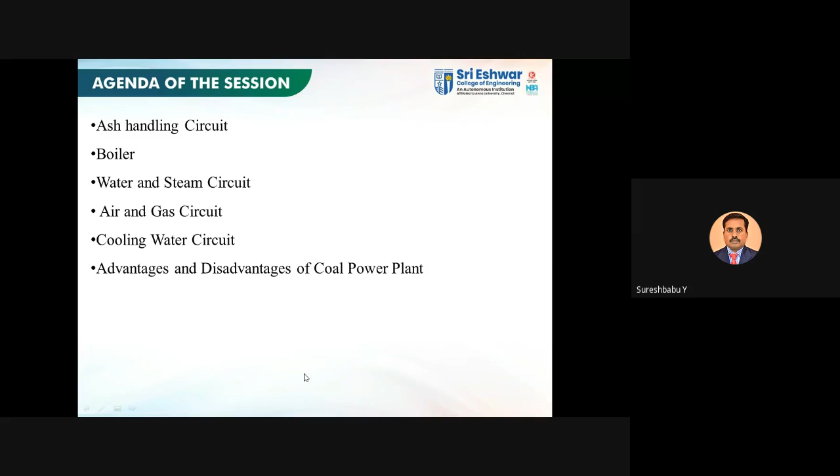Last class we discussed ash handling circuits, water steam circuit, air gas circuit, cooling water circuit, and also disadvantages of coal power plants. Today we are going to discuss the ash handling aspects and boiler. So this is our today's agenda of the session.

So why is ash handling difficult? We discussed that the reason is ash is normally at hot conditions, so you have to take care of it and it should be properly disposed from the furnace. Ash is normally of abrasive nature, and also dusty and irritative, so it should be properly handled, otherwise it will impact the person handling it. A lot of humans are involved in ash handling, so they also get affected due to the dust of ash.

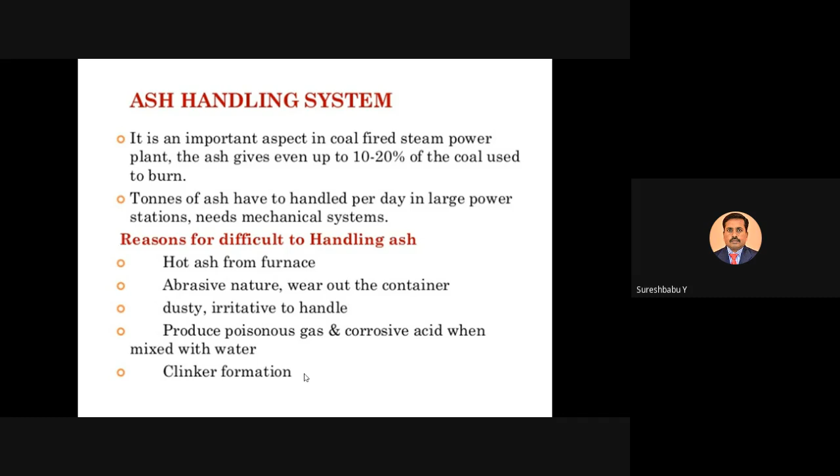So you have to use proper protective equipment, personal protective equipment, PPE kits, so that people have to use face mask, helmets, and other protective equipment, everything they have to use. So these are the reasons for the difficulty in handling ash.

So typical ash handling plant we also discussed. If our coal is a good one, then the ash produced is very less. If the coal is poor quality, then ash will become more. Every day, more than 5,000 tons of ash come out from the furnace if we produce 2000 megawatts of power from the thermal power plant, so every day you have to remove about 5,000 tons of ash from the furnace area. So it's a very big problem, ash handling is a very big problem, and you have to properly handle it.

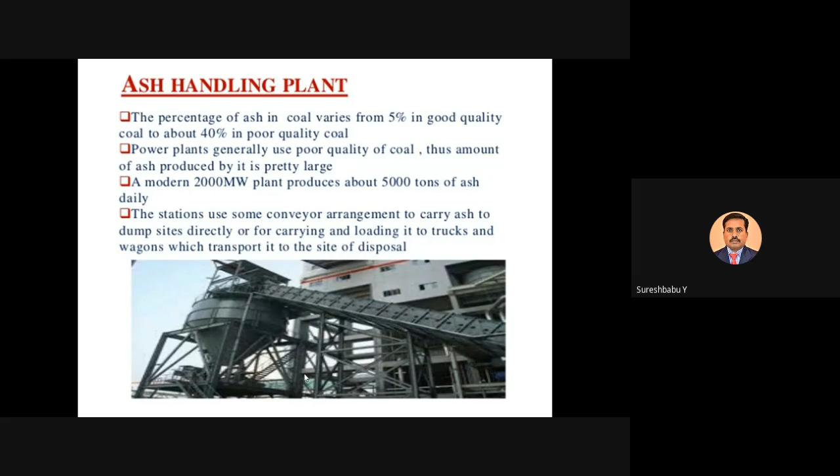That's why you need some loading devices and ash handling devices, trucks, wagons, all are required. That we discussed yesterday. And also we discussed the mechanical system, hydraulic system, pneumatic system, and steam jet system. That is also discussed yesterday. So with help of these systems only we are removing ash.

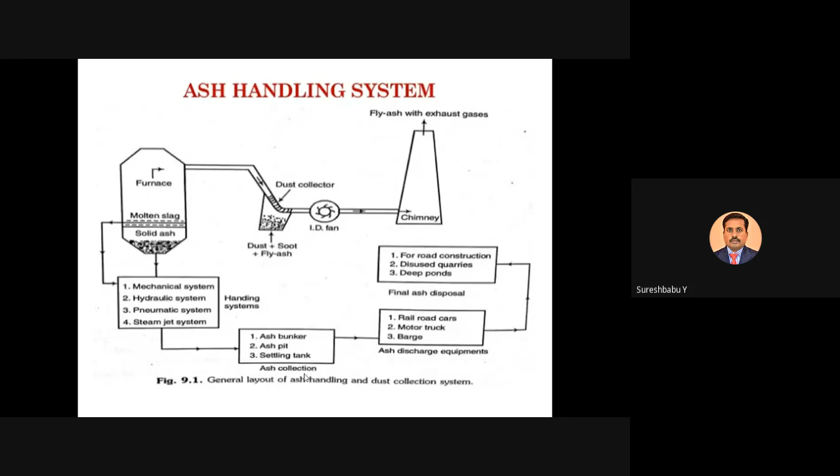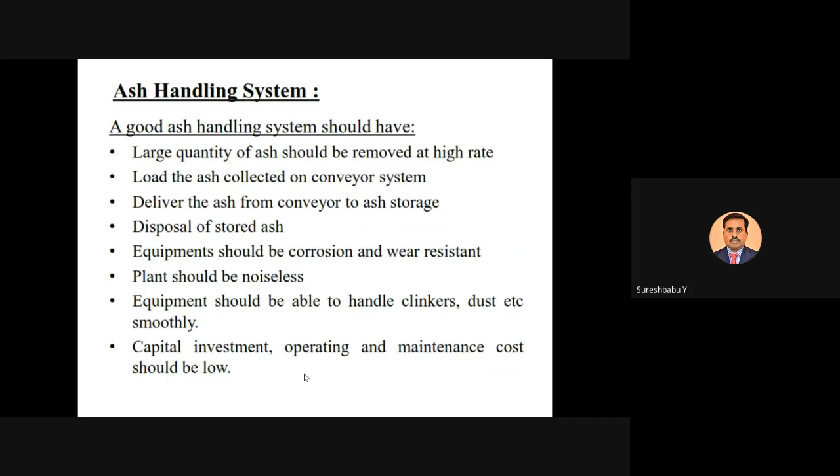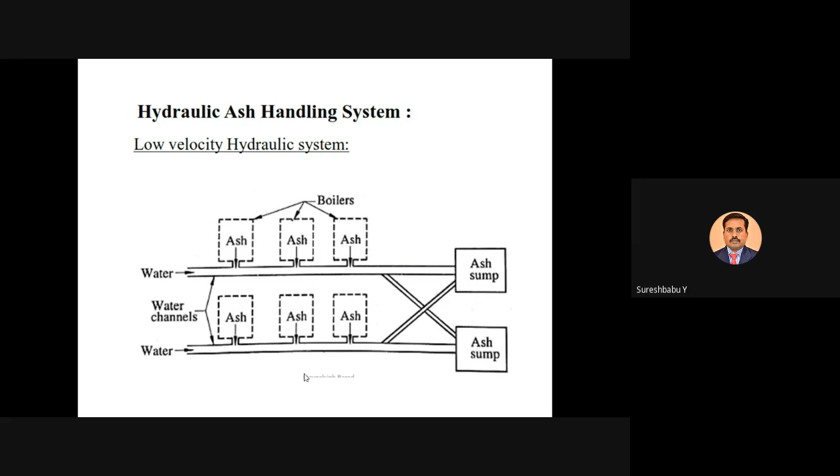The ash in the furnace area is transported from furnace to the ash storage area or ash disposal area. We discussed the mechanical belt conveyor based system, and the steam jet system along with the pneumatic system, each system's advantages and disadvantages, and what is meant by hydraulic ash handling system, how with the help of hydraulic water is used, and low velocity hydraulic system, high velocity hydraulic system, how they are used for ash handling, all those things we discussed.

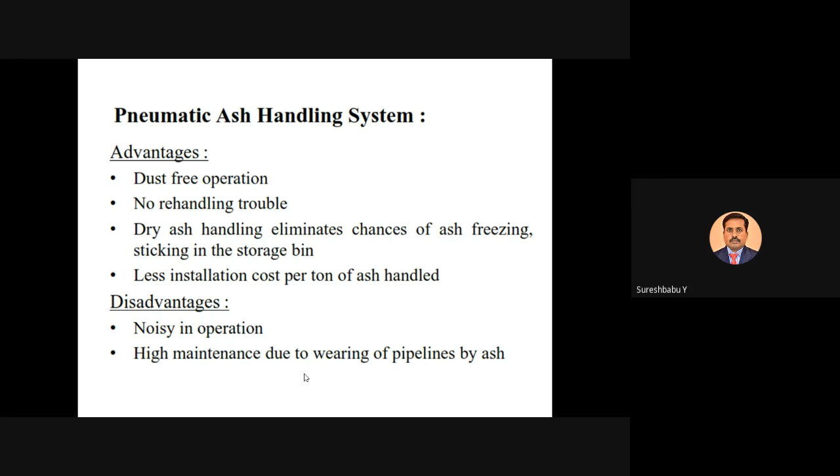And some disadvantages of pneumatic, and also some advantages of pneumatic we were discussing. Now today we come to some additional portion of ash handling system, that is dust collection and dust disposal. So this is today's agenda, after that we will move to the boiler. So this is about today's session. We will come to the point.

So dust, what is meant by dust? Dust is a very fine particle present in the ash. Normally it ranges from 0.01 micron to 1 micron, so it's very minute. Do you know what is the meaning of micron? It's a very minute particle. Micron is 1,000 parts of 1 mm.

So that kind of fine particle present in your ash is called dust. You have to properly treat this dust, otherwise it will give impact to the ash handling persons, and also impact to the environment if not properly treated. So the fly ash particle is also present in your dust.

That fly ash particle directly goes to the atmosphere, meaning the environment becomes dirtier. So it gives a lot of environmental impact to the people and the environment. We have breathing problems like cancers, asthma, shortness of breath - all these things come through this effect.

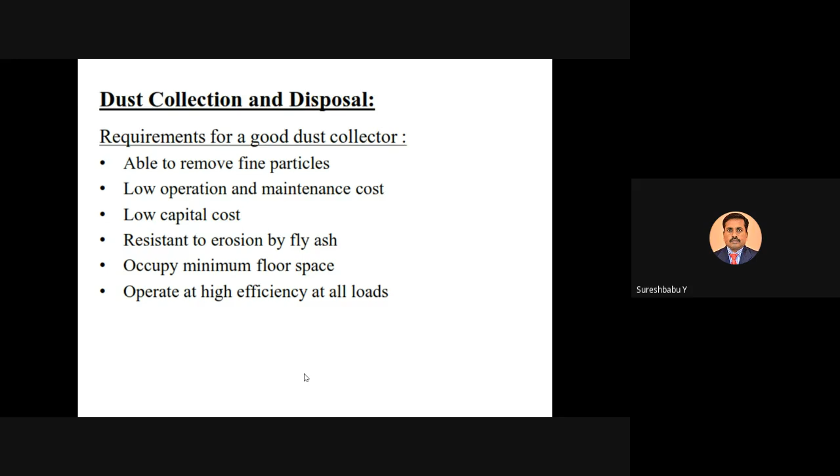If plant efficiency is high, your dust collector should also cooperate with all types of load and all types of plant operations - medium load conditions, heavy operation conditions - your dust collector should cooperate with all of these, meaning it should be flexible. That kind of system you have to develop in a thermal power plant. So the dust collector should have that requirement. These are some of the requirements of a good dust collector.

Next, dust collection and disposal. In coal-fired boilers, the flue gases have certain particles of solid matter called smoke or dust. Due to the combustion of coal, flue gases come from the furnace area, and these flue gases have certain particles of solid matter. So it has some solid particles, and that solid particle is called smoke or dust.

What is the particle size? I already told you it ranges from 1 to 100 micron. If the range of the solid matter particle size is from 1 micron to 100 micron, that is called dust. This is the actual definition for dust - please note, 1 to 100 micron. If the particle size is more than 100 micron, then that is called cinder. This is the basic difference between dust and cinder.

So what I'm trying to say is, without collecting this solid matter or smoke, that will create an impact to society, as I already told you.

For that, you have to use some dust collecting device. There are two different types of dust collectors commonly used in thermal power plants: mechanical dust collector and electrostatic dust collector. We discussed how ash is handled using mechanical, pneumatic, steam, and hydraulic handling systems, from furnace to ash disposal. In a similar manner, the dust present in the flue gas, which is 1 to 100 micron particle solid matter, should be removed before it goes to the chimney. That is the main intention of the dust collector.

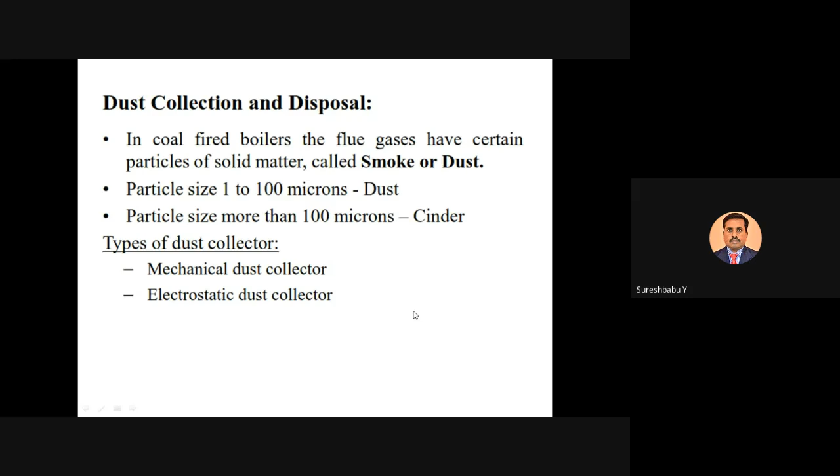Now we'll see the mechanical dust collector. The different types normally used are dry type dust collector and wet type dust collector. In the dry type dust collector, there are two types: gravitational separator and cyclonic separator. In the wet type dust collector, there are two types: spray type scrubber and packed bed scrubber. So these are the four different types of dust collectors - dry type two types, wet type two types - normally used in thermal power plants for collection of dust.

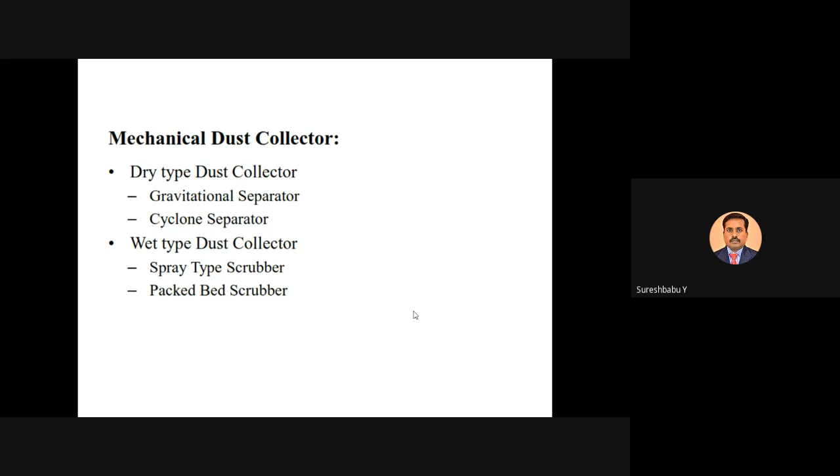Air will be passed to the inlet area. Due to the gravitational effect, due to the weight of the particles, the solid particles come to the lower end and go to the dust collection area - meaning a hopper is located in the lower portion. With help of normal gravitational force, the solid waste is collected. The remaining part is only clean gases that go to the chimney. This is simple in construction - there is no mechanism involved. Only with the help of gravitational force can we collect the solid particles present in the flue gas, that's all.

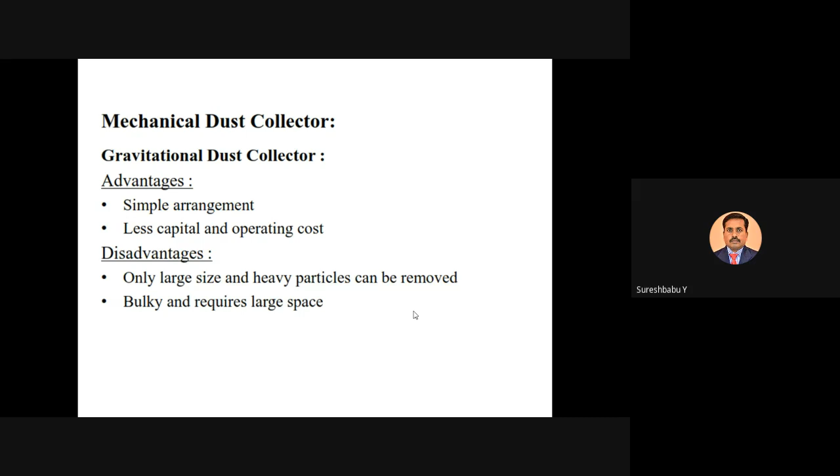Next, what are the advantages and disadvantages of gravitational dust collector? The gravitational dust collector is normally a simple arrangement with less capital and operating costs - these are some advantages. But the disadvantages: only large size and heavy particles can be removed because due to the gravitational force, the solid particles are removed, and there is no mechanism involved. So only bulky, high-size heavy particles can be removed. Also, bulky space is required because you need a bulky horizontal shape cylinder-based dust collector - you need a large amount of space for implementing the dust collection system. These are some of the disadvantages.

That's why we are moving to another type of dust collector, the cyclone separator. The cyclone separator is one of the famous dust collectors commonly used in thermal power plants. Most thermal power plants and some furnaces use the cyclone separator.

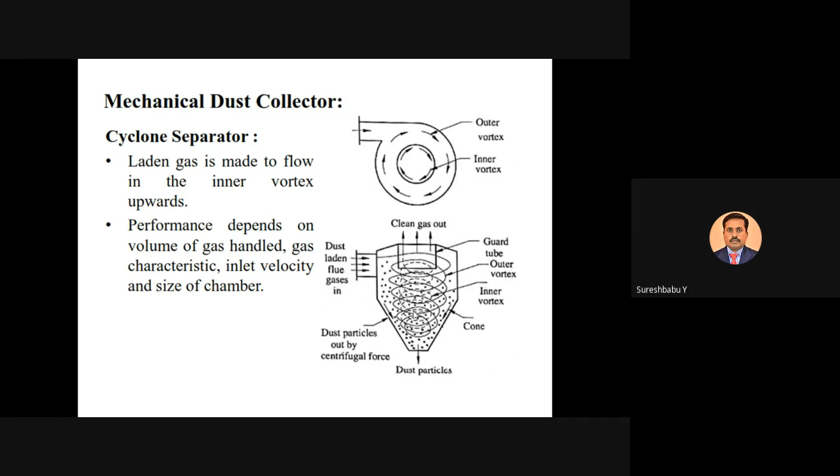Due to the centrifugal force, the high weight particles present in the flue gas, that means solid matters, the solid dust matters are deposited in the cyclone separator's outermost frame. The particles are deposited there, and at the center portion you only have gases - clean gases, due to the vortex and cyclone cone effect, and also the centrifugal force. Only the clean gases remain in the center portion, and the remaining solid particles touch the cyclonic separator surface. Due to the cyclonic effect, the clean gases come out from the outlet, connected to the chimney, so the flue gases move from the cyclonic cone center to the chimney, and only clean gases go to the atmosphere. This is how this construction works, and it is commonly used.

So what are the advantages of cyclonic separators? They are highly efficient for bigger particles, have low maintenance costs, and are simple and cheap. These are some of the advantages and disadvantages.

Sir, audio not audible.

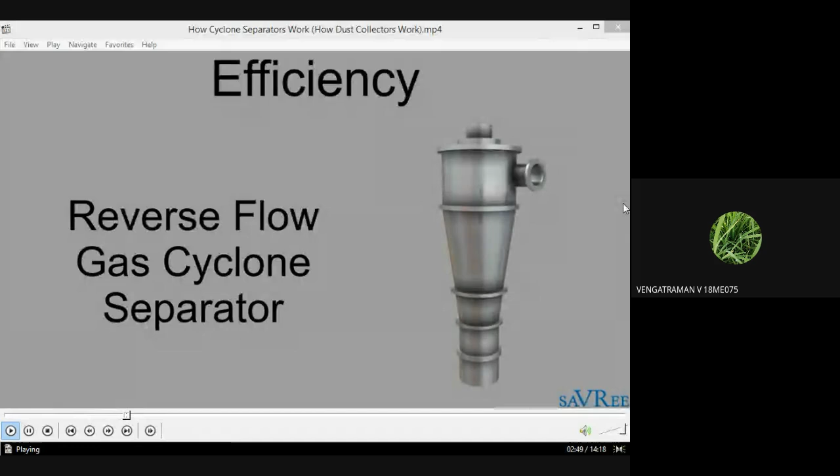because particles are different sizes.

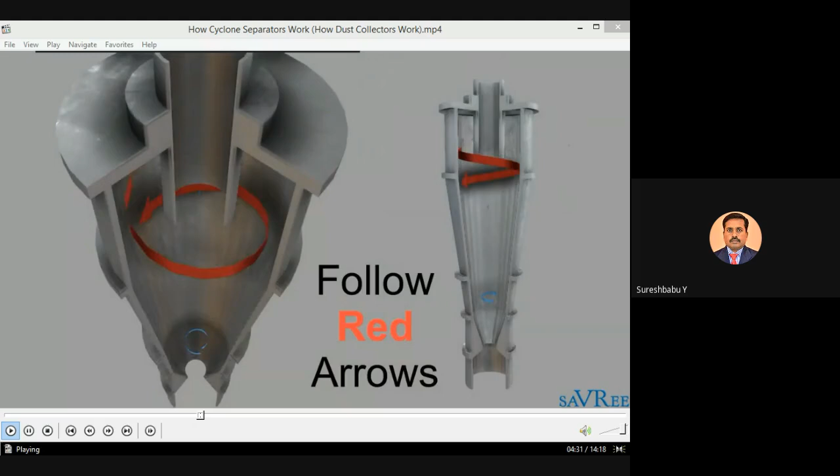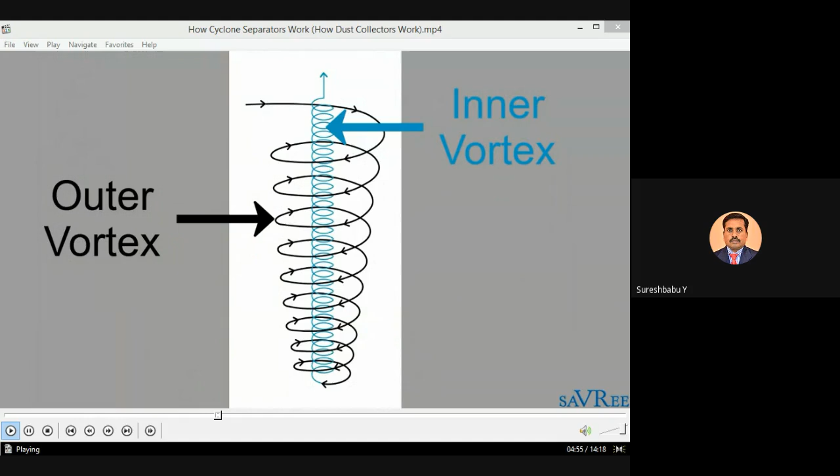Due to the centrifugal force, the solid particle touches the surface of the cyclone separator. So the bulky size solid particle is deposited on the separator surface, and in the center part you have only clean air. That clean air goes to the chimney. This is how the cyclonic separator works.

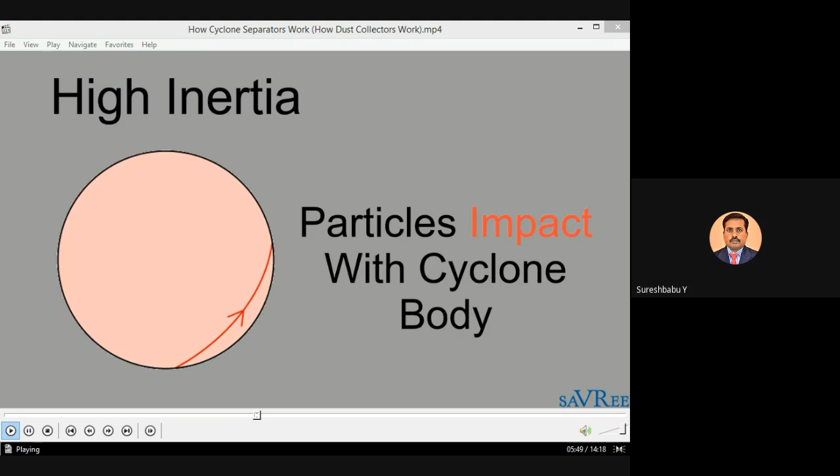The solid bulky particles are discharged downwards. With help of a hopper, you can collect the dust. So this is about the cyclonic separator.

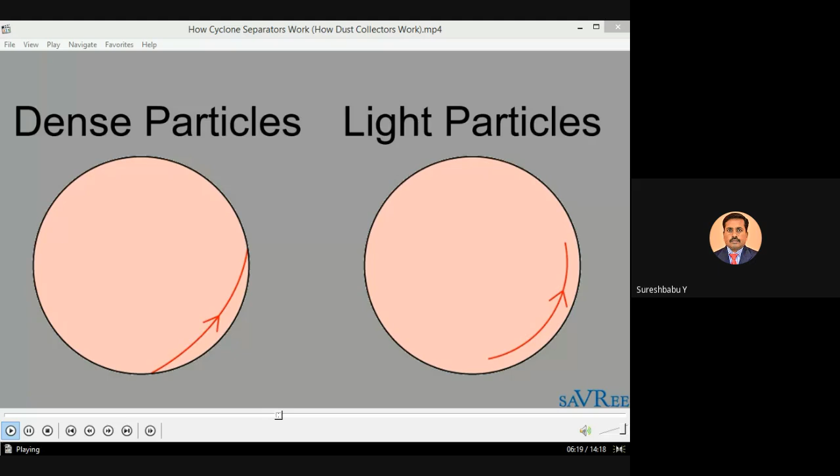Now we'll come to the other type of dust collector.

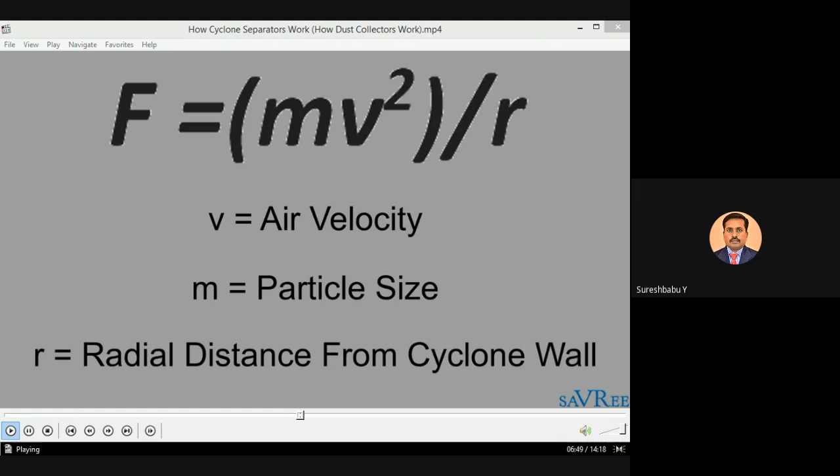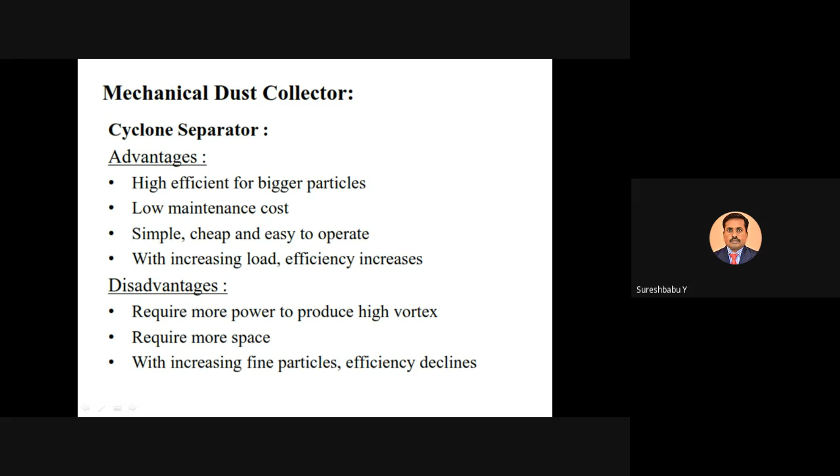So this is about the cyclonic separator. Now we'll come to the other type of mechanical dust collector, that is the wet type.

Previously we saw two different types of dust collectors - the gravitational type and the cyclonic separator - these are called dry type dust collectors. Now we will see the wet type dust collector. In the wet type dust collector, we add a water injection system. With help of water spray, we capture the dust present in the flue gas.

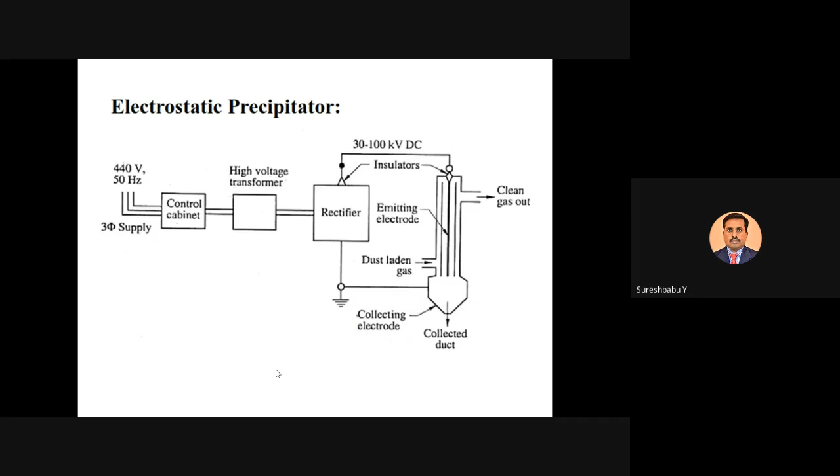With help of electrostatic ionization concept, the dust is removed. This is normally used in most steam thermal power plants and coal-based thermal power plants.

The concept behind the electrostatic precipitator is, due to the ionization effect, you have two plates. One is called positive, second one is called negative plate. Due to the power supply, the ionization effect will be created on one plate.

Due to the ionization effect, the flue gases pass through the electroprecipitator. One plate is positive, another is negatively charged. The positive plate ionization takes place, and due to this effect, the negatively charged plate attracts the particles.

Due to this effect, the dust is deposited, and that will be removed at frequent time intervals. This is the removal of dust present in the flue gases. After removing the dust particles, only the clean gases remain, and these clean gases come from the outlet of the electrostatic precipitator and go to the chimney.

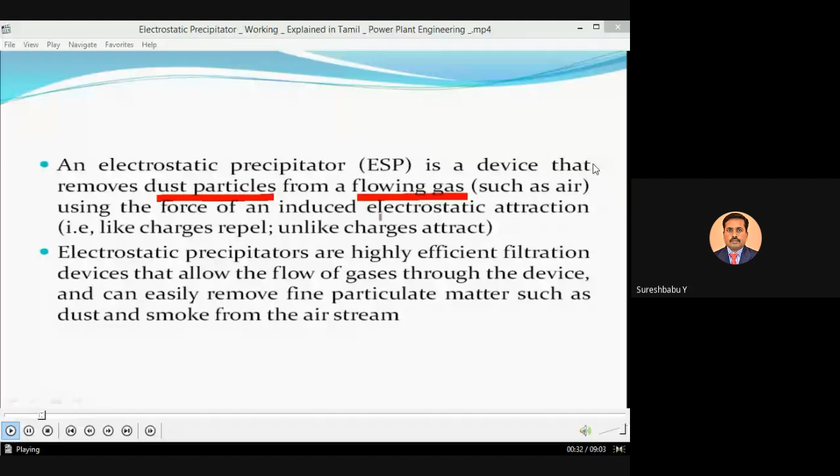An electrostatic precipitator is a device that removes dust particles from a flowing gas such as air. Flowing gas is nothing but flue gas, using the force of an induced electrostatic attraction. So the concept is electrostatic attraction - like charges repel, unlike charges attract. This is called electrostatic attraction.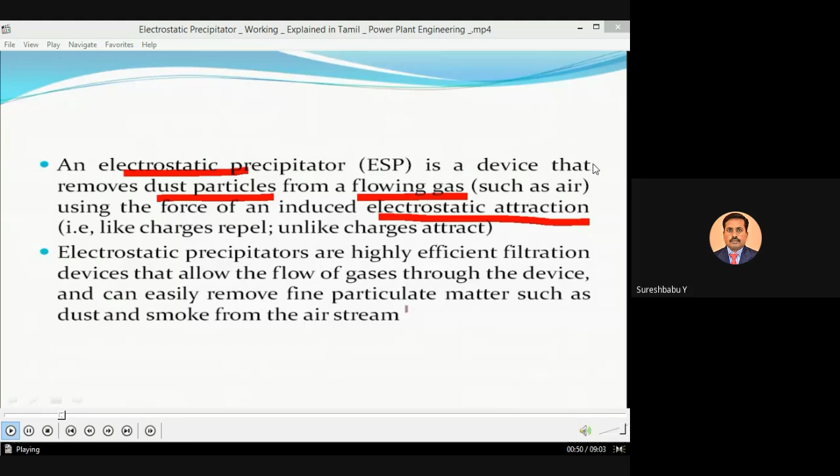Precipitators are highly efficient filtration devices. The principle of the electrostatic precipitator is the method of dust collection that uses electrostatic force and consists of a discharge wire and collecting plate. The discharge wire has high voltage applied, and due to this high voltage, the ionization effect happens.

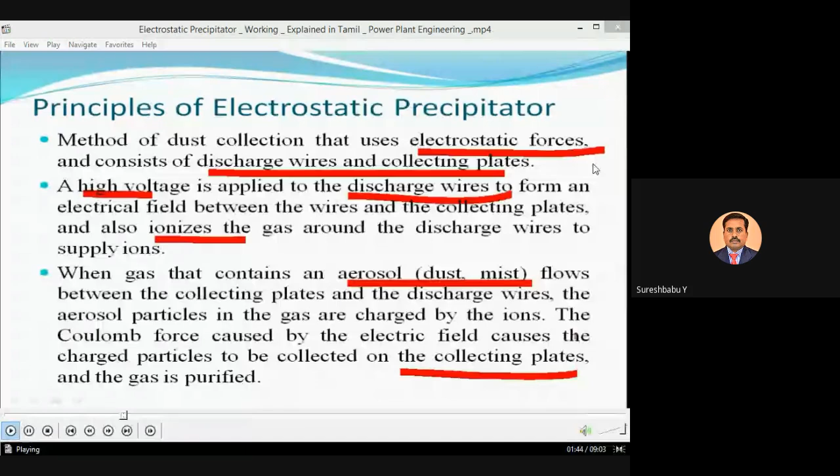What is meant by aerosol? Aerosol is nothing but the combination of dust and mist, normally present in the flue gases. That is called aerosol, and it flows between the collecting plate and discharge wires. These are the two important components in your electrostatic precipitator.

So this is your gas flow, and this is your discharge wire. When the gas flow goes to the discharge wire, the ionization effect is created. Due to that, the collecting plate is positively charged, and your discharge wire is negative.

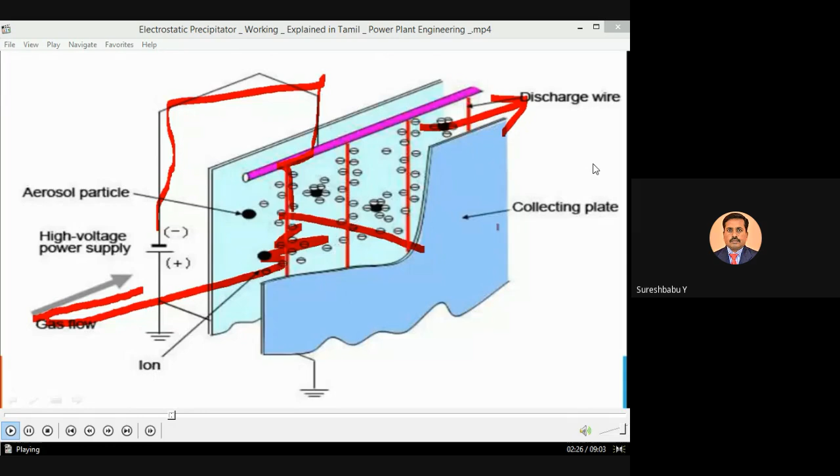One is positive, another is negative. Due to this, electrostatic charge is used to separate the particle from a dirty gas stream. High voltage direct current electrodes are used to establish a strong electric field. This field is called corona. So what is the effect of corona? The same kind of word is used here also.

Negatively charged particles, as they pass through the device, are forced onto the wall by this field. The collection plate is used for this collection surface. So what are the different types of ESPs?

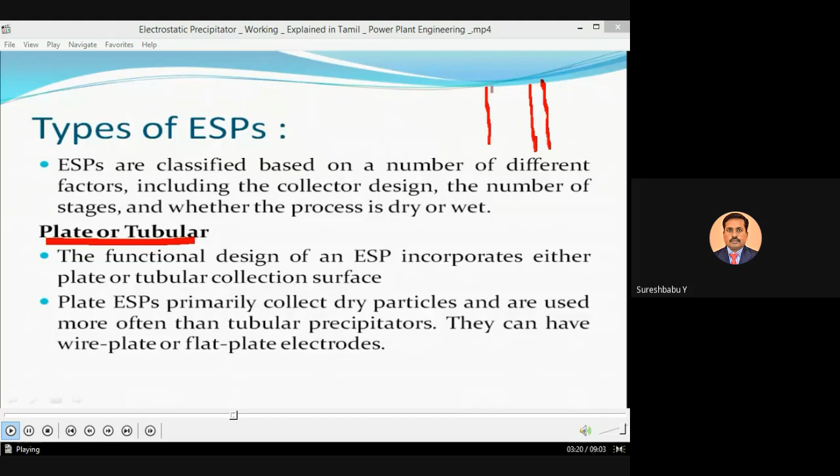Tubular type, plate wire type - many types are also there.

So the general reaction is one is positive, another one is negative. While passing the flue gases, it touches the one.

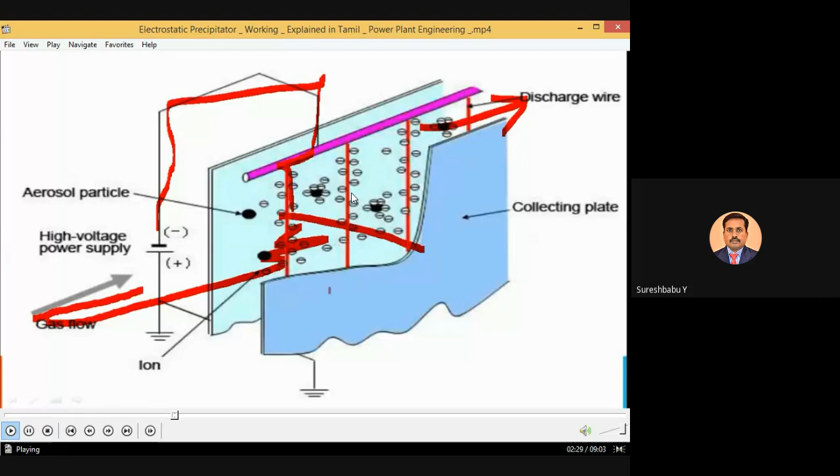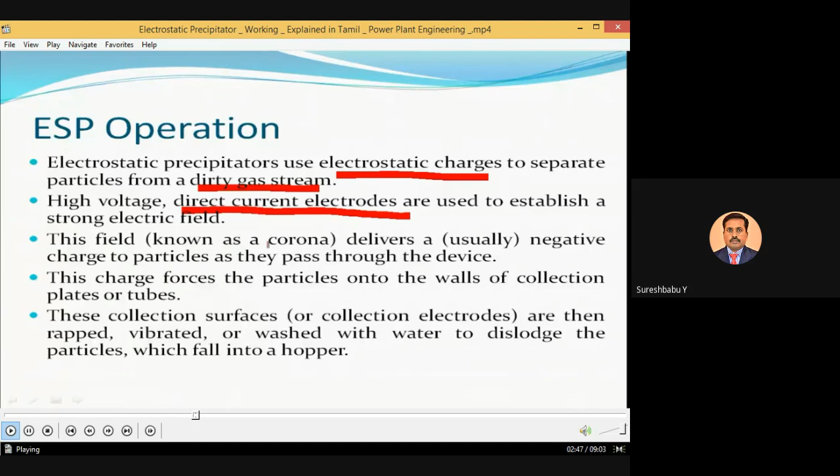So at frequent intervals you can remove the dust. The remaining part is only the cleaner gas that goes to the chimney. This way you can collect the dust with the help of the electrostatic precipitator.

So we will come to this slide.

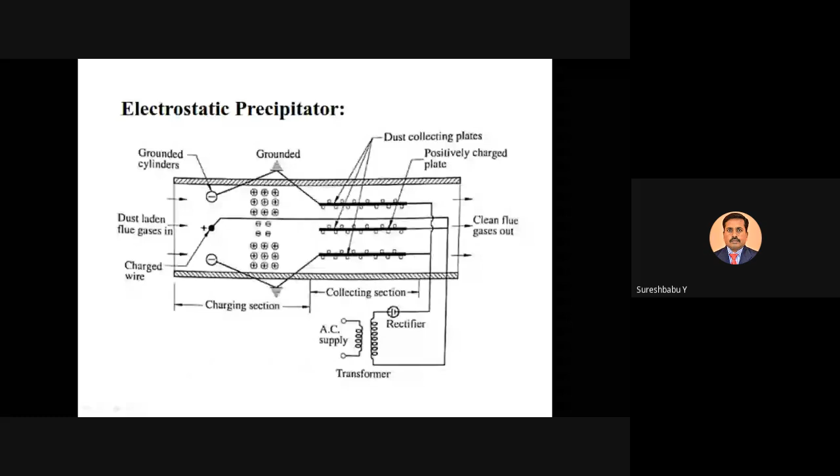So this is the concept behind the electrostatic precipitator. What are the advantages? Fine dust particles can be removed efficiently, low maintenance cost, easy to operate. Dust is collected in dry form, without using water, so you can easily collect it. Due to the ionization effect, it is easier to collect.

Disadvantage is high capital cost. Cost of running is also more, and space requirement is high. So with the increase of gas velocity, the dust collection efficiency is reduced.

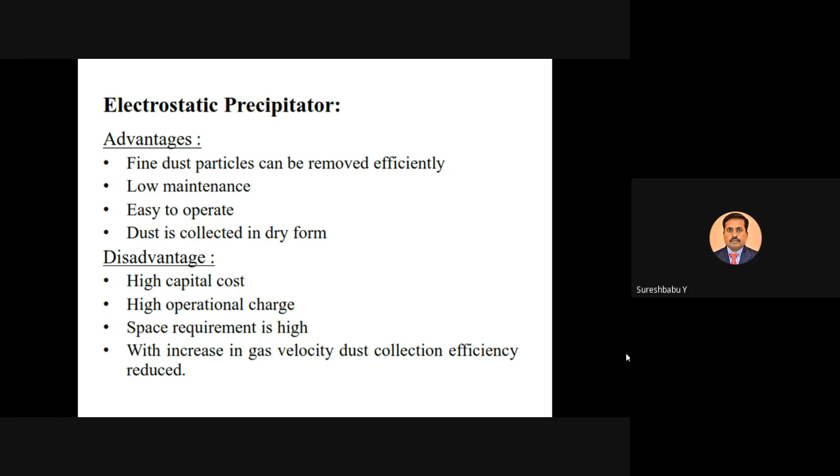So at low velocity we have to pass it through the electrostatic precipitator, then only we get more amount of dust collected. So these are some of the advantages and disadvantages.

Now we'll come to the boiler, and to the end of the session. We discussed different types of dust collection, now we'll move to the boiler. The purpose of the boiler is to generate steam. We already discussed different types of boilers in thermal engineering subjects, everything we studied there.

What are the functions of boiler? What is the function of economizer? What is the function of condenser? How is it used? All those things we discussed already. I'm just putting this slide as a reminder.

So a boiler or steam generator is a closed vessel in which water under pressure is converted into steam. It is always designed to absorb maximum amount of heat released in the process of combustion, and due to that combustion process, it absorbs maximum heat and converts water into steam. That is the function of the boiler.

What are the different types of boilers used now? Horizontal and vertical inclined boiler based upon the axis, then fire tube boiler, which is normally used — hot gases go into the tube, water is surrounded around the tube. Based upon that, the water gets more heat and is converted into steam. One example is the locomotive boiler.

And water tube boiler, which is also commonly used in thermal power plants — water is inside the tube and hot gases surround them, so the water automatically gets maximum heat and is converted into steam. That then goes to the superheater and converts into superheated steam, which goes to the turbine, and due to the expansion process, the turbine starts rotating.

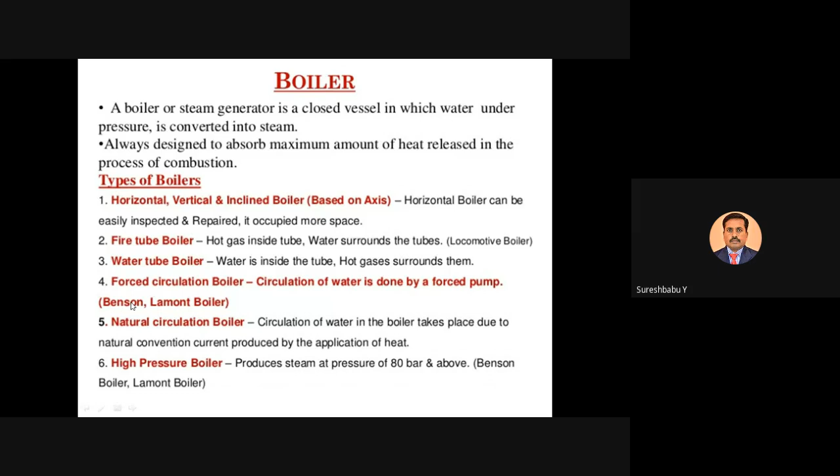High pressure boiler, that is Lamont and Benson boiler, produces maximum steam pressure of 80 bar. So if you want high pressure, meaning you want to increase steam producing capacity, you can go with a high pressure boiler. These are the different types of boilers used in the thermal power plant.

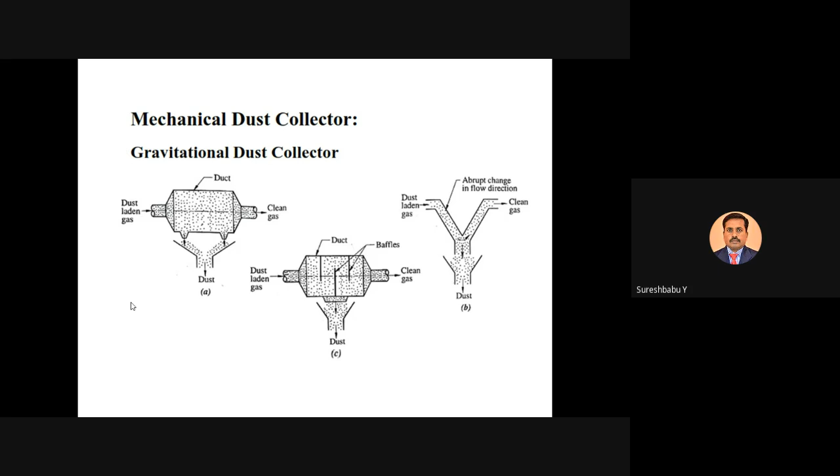That's all from the thermal power plant. So coal-based thermal power plant, today we have completed. You have to prepare well for it — what is coal-based thermal power plant, what is the difference between steam and coal-based thermal power plant, what are the different circuits involved, how it works, and what are the two byproducts in coal — that is ash and hot gases. How the ash is treated, with what kind of ash handling system it is disposed, how the poisonous gases are treated, how dust is removed from flue gases, what is done with dust — all those things we discussed, and finally we discussed about the boiler.

What is cyclone separator, what is electrostatic precipitator, and finally we discussed boiler. That's all for now. If you have any questions, you can ask. From tomorrow onwards we will move to the next chapter of the first unit — another type of power plant, and finally we are going to discuss how to improve this thermal power plant's efficiency, and what additional systems we can add to improve the efficiency of the plant. That's all from now. If you have any questions, you can ask, otherwise we can leave.

No sir, no doubt. Thank you, sir. Okay, thank you so much. Thank you, okay, you can leave. Okay.